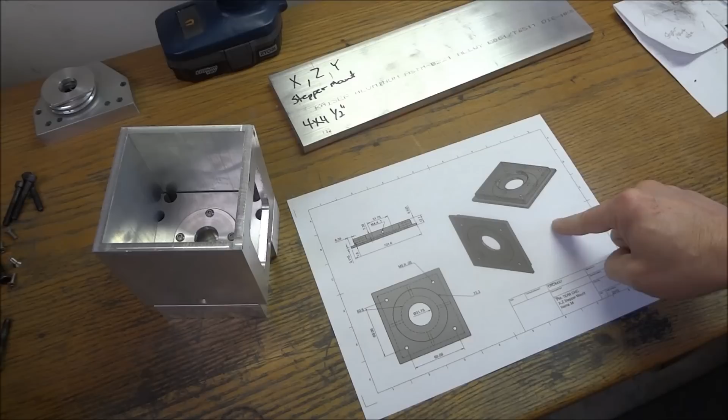Well, we're moving right along, and in the last video we finished up our bearing covers. The last thing we need to do for our X mount is our stepper motor mount. So today we're going to start working on that. We're starting off with a 4x4 by 1/2 inch piece of aluminum. We're going to be boring.

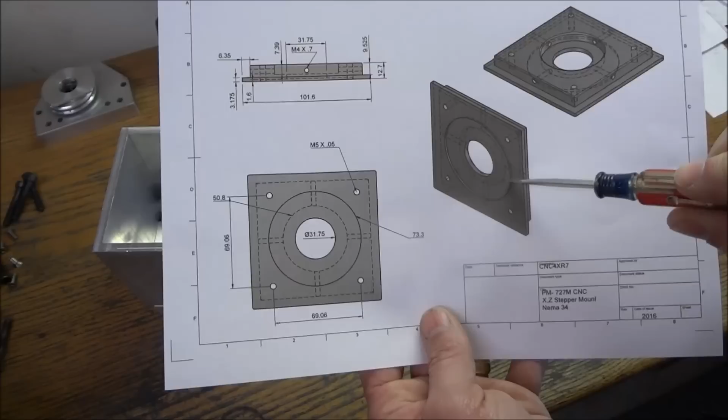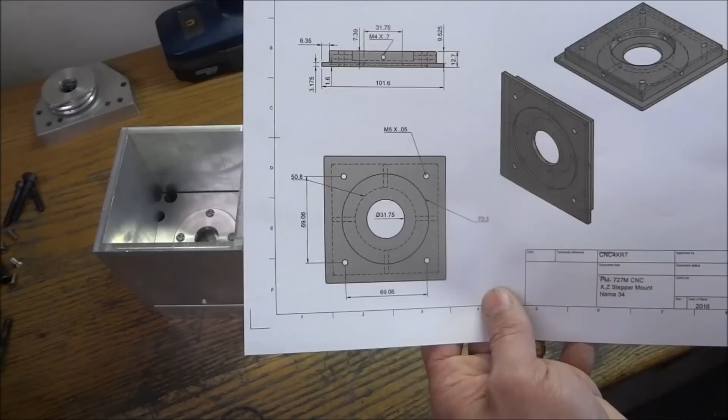So this is what our stepper motor mount looks like. We've got our hole in the center for the shaft to go through. We've got this little recess for the stepper motor. We've got our 4 holes to mount the stepper motor. And we've got these holes to mount the plate into our spacer, one on each side. And then on the back side we've got this little recess to give us some room for our coupling.

So I'm going to get this piece of stock cut. We'll go out to the mill and we'll get started.

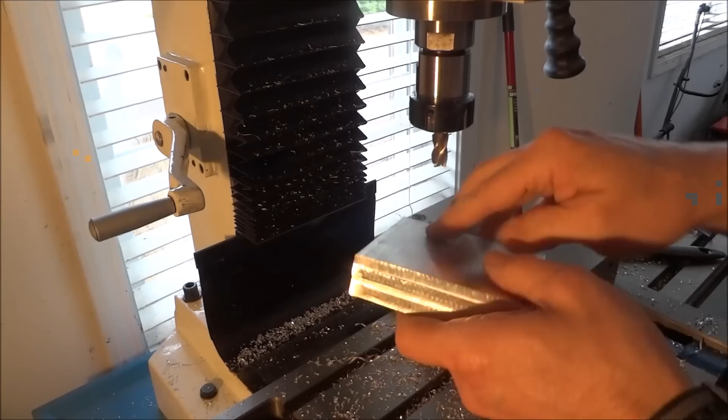Okay, I've cleaned up the edges on these two pieces, and now they are 4 inches by 4 inches, and this will be for our X-axis stepper and our Z-axis.

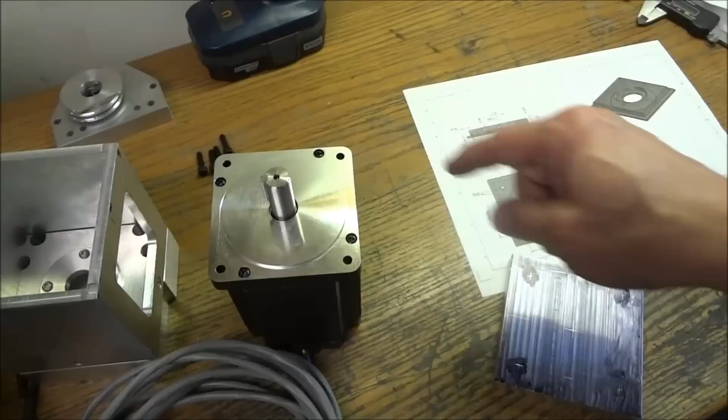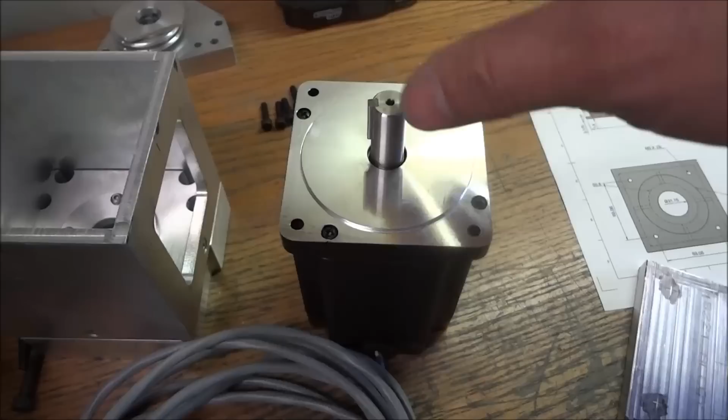Okay, so we've got our stepper mount laid out. I laid out for the 4 holes to mount the stepper, these 4 holes, and also the center. And we're just going to mill out the center hole and also this recess for the stepper to go into, and then we'll drill our 4 holes. Once we get that done, we'll flip it over and do the back side right here and get that recess. So let's get out to the mill and we'll start working on this.

Okay, we've got our stock mounted in the vise, and I'm just going to center drill and then drill a 11/64 hole, and that should be good enough for our M5 by 0.8.

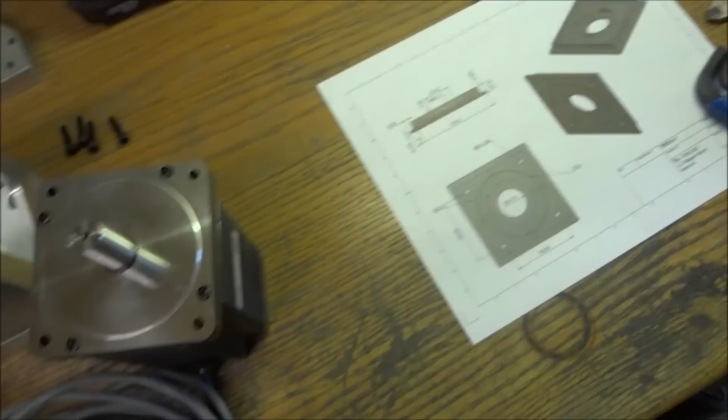That's just the through hole for the shaft for the stepper and the coupling. Okay, next we're going to do this 73 millimeter recess right here, so that this will fit down inside it. This is 73.3 millimeters in diameter, and it's about 1.6 millimeters deep.

Okay, I've moved this out in the center hole. I've left the boring bar in the center hole and I've moved it out, and I've got to get it out wide enough so that I can switch it into this outer hole. So in order to turn that big of a radius, I'm going to have to move the boring bar from the center hole to this outside hole, and then we'll have to adjust this back.

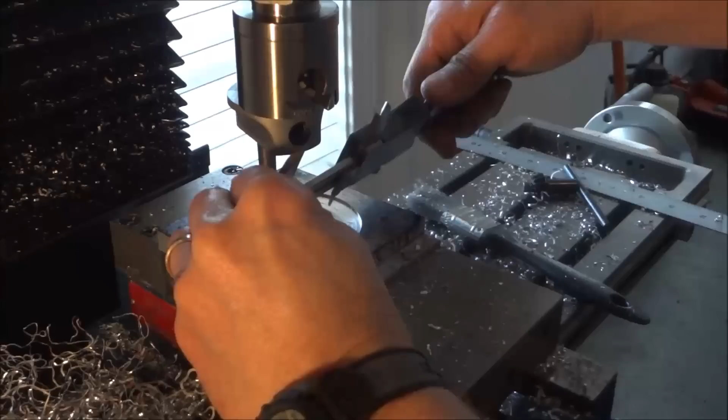Okay, we're done on this side, so I'm going to take this out. I'm going to double check all this, and we'll flip it over and we'll work on the back side.

Okay, so I flipped it over and got it in the vise, and while we still have the boring bar set up in here, I'm going to relieve this area right here so that the coupling, if it needs to, it can slide down in there without any interference. Let's get started.

Same as we've been doing, we're just going to take a little bit and then gradually work our way out until we get to the correct diameter.

Okay, we're about 42. But you can see how the coupling will drop down in there, and I want to be able to get to the set screw. You see how it's in the end, so you got to have enough clearance if this goes down in there for you to be able to reach that set screw. So I need to go about 8 more millimeters.

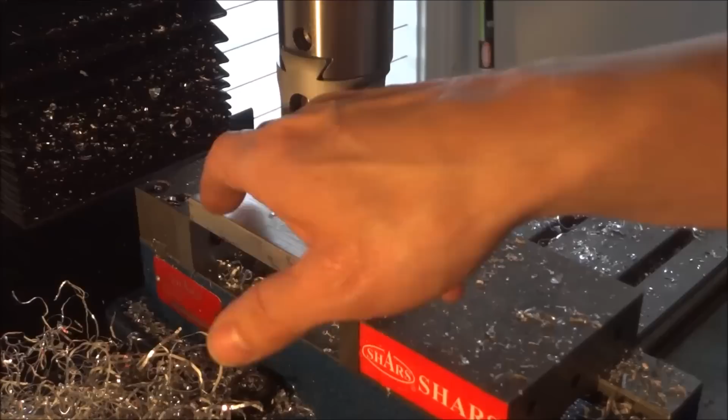That should give me enough room to get in there and tighten that up if I need to. Okay, so I'm going to take this boring bar out, and I'm going to put my end mill in here, and we're going to come along and put that recess all the way around. It's going to be a 1/4 inch wide and 3/8 inch deep.

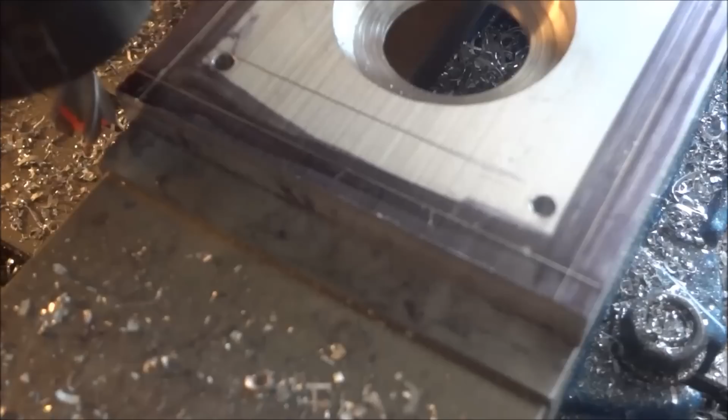Okay, so I've got my stock raised up. What I did was I just took a piece of cardboard and shimmed it up, and so now I have just literally a sheet of cardboard more than 3/8 of an inch, and I've set my depth, and you can see I've scribed my lines here, and we're just going to come over a 1/4 inch and put our step all the way around. So let's just do that.

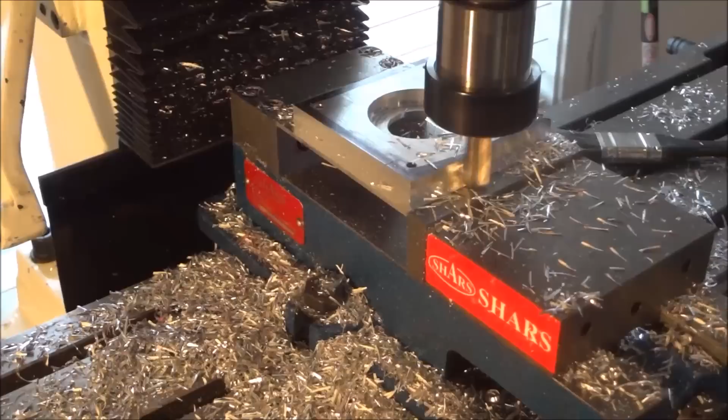Okay, so I've just taken a scrap piece of 1/4 inch stock and just kind of checking it. I think we're fairly close. So now I'm going to just take some measurements and we'll get it just right. And also check the fit with the square tubing.

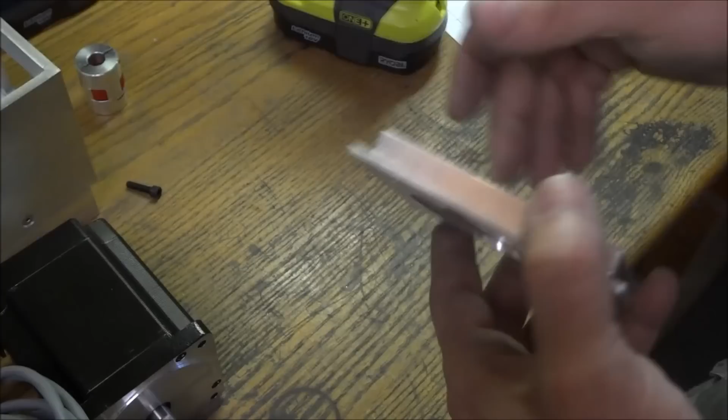Alright, well, I'll clean this up with a little sandpaper. Cover fits on there real nice, like so.

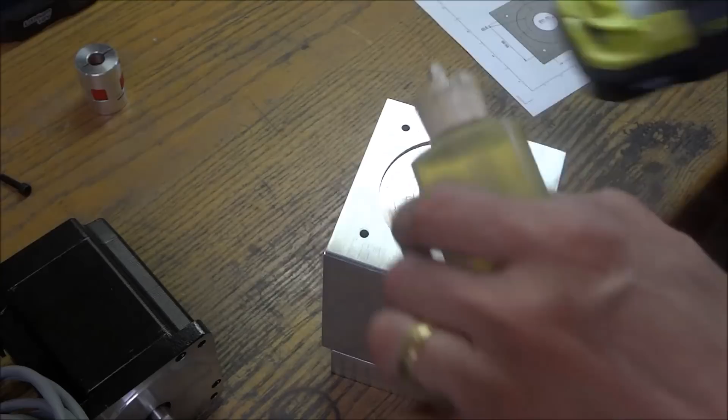And now we need to, I want to tap these holes next. So I've got we're going to be using M5 by 0.8 screws, and I've got a M5 by 0.8 tap here. And I'm just going to run this down through here and tap these holes. Got a little tapping fluid here. This is just 2 parts kerosene, 1 part motor oil. Seems to work good for me.

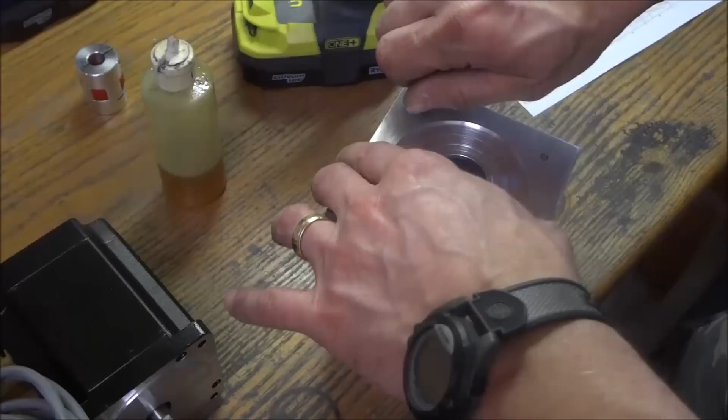Tap these holes. That'll work. So I'm going to get the rest of these tapped and we'll be right back.

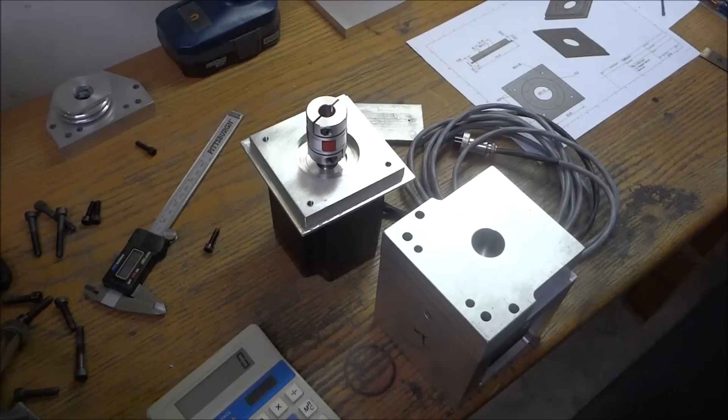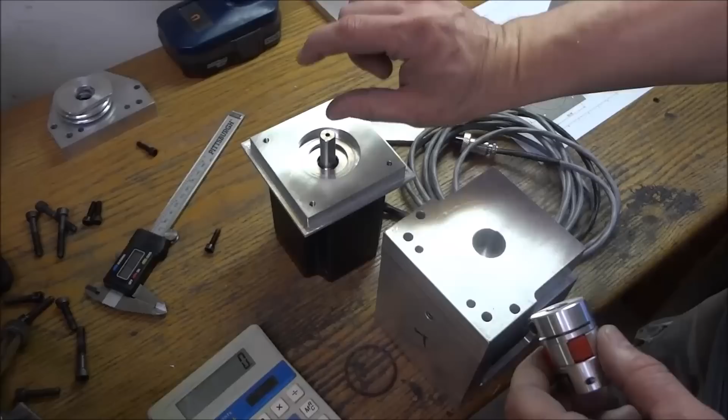Alright, so now that I have my holes threaded, what I want to do now is make sure my distances are going to be correct. Depending on what type of couplings you get, they all vary in size, and even though I took the dimensions they sent, you really never know how it's going to work out.

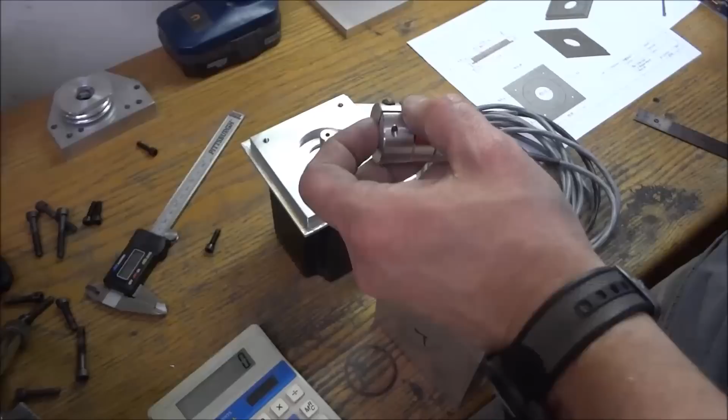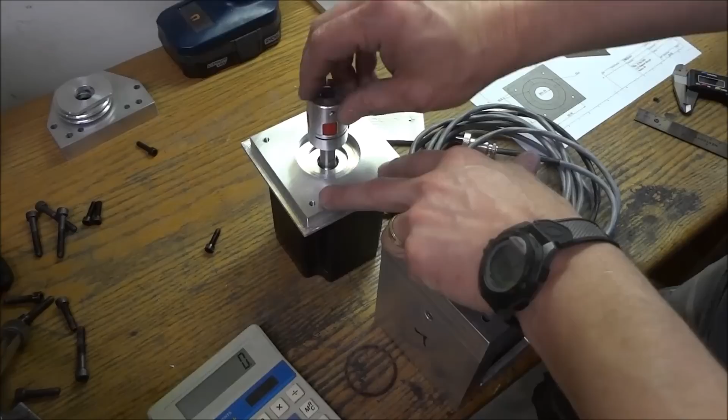These particular couplings are 40 millimeters long, and they go in about 23 - is that right? Let me double check. They go in about 20 millimeters on each side, but it's not completely all the way through. And this shaft is 32 millimeters, so it's not going to go all the way down.

So I kind of guesstimated on the length of my spacer, and I really didn't know for sure what the length was going to be until I got it all mocked up. And it looks like that 4 inches is just about 10 millimeters too long, or about 3/8. Now, I made the error of going ahead and cutting this out before I took that measurement.

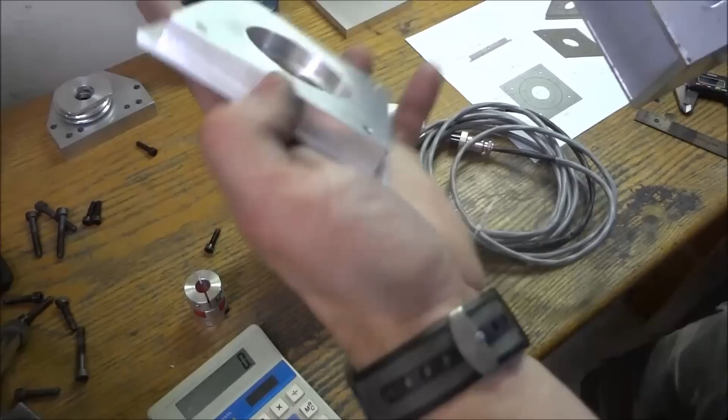So now this is not going to be quite centered, but it'll still be fine because this is flush with this, and then this will be flush with the stepper mount, because this recess is actually 3/8 of an inch deep. So it'll just be about like sitting like that.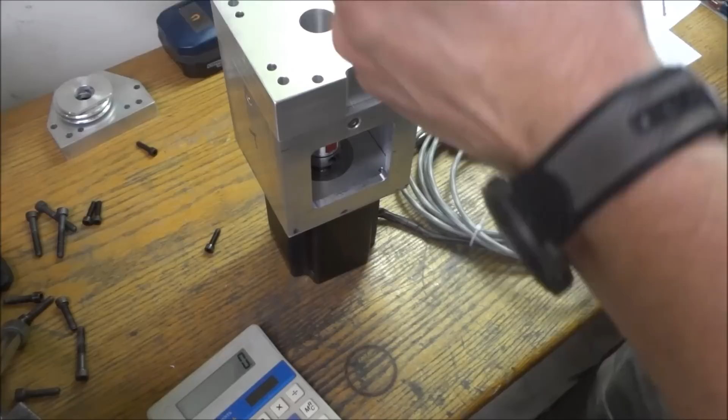As it sits right now, what I did was I put it all together, and then I measured straight down like so to the center of that coupling to this bottom here, and that's 100 millimeters.

And I know that where the bearing sits and this right here is 18 millimeters, so I subtract that from 100, and I get 82 millimeters.

Now the distance between where the bearing sits on the ball screw and the end of the ball screw is 70 millimeters. So that's 12 millimeters. That's going to give me a 12 millimeter gap right there.

So what I'm going to do is, if I take 10 millimeters off of this, then that'll leave me with just a 2 millimeter gap in there, and that should be sufficient.

Now you're going to have to do this on each axis, because the Y axis is a little bit different, and the Z axis shaft is a little bit different, so the coupling may be a little longer or shorter. So depending on what couplings you get, you're just going to have to tweak this dimension, but do as I did and cut it a little long.

Save this until you get this measurement set just right. So what I'm going to do now is go trim this off in the mill, take 10 millimeters off of it, and then we'll come back.

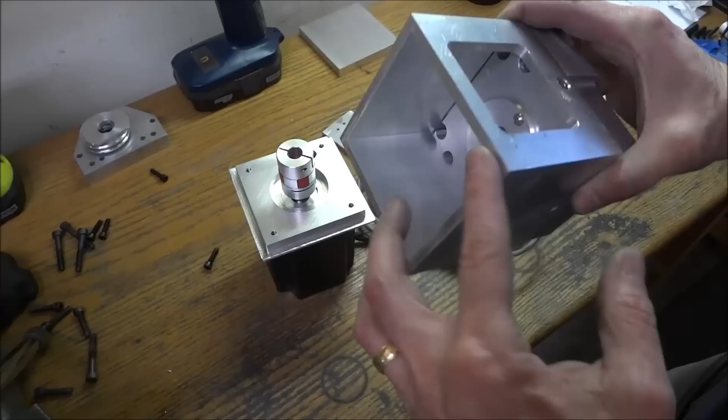Alright, so I've bandsawed a 1/4 inch off, put it back in the mill, and then took it down to 10 millimeters. The total width of this spacer now for the X is 90 millimeters.

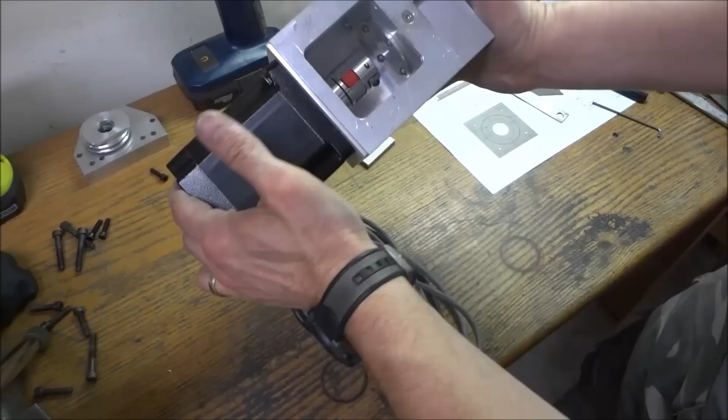And when it's all together now, it looks like it's going to work just fine.

Okay, so now that I have that adjusted, when you do this, you can just make this 10 millimeters shorter. But you can see we're still going to have clearance there to bolt up our stepper mount, which is what we're going to do next.

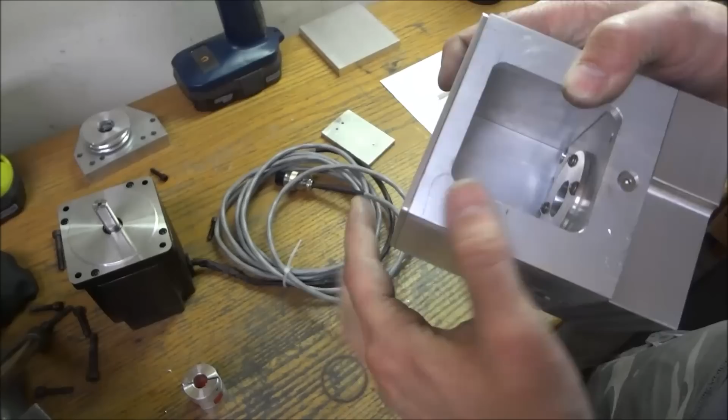And we'll probably just use these same screws. So we'll just drill 4 holes. I'll do it with this clamped together, and then just like what I did with this, and then tap it. So now let me get that set up and we'll do that.

Okay, so I've got the stepper mount kind of taped in place just to keep it there. It's clamped in the vise. I couldn't turn it 90 degrees because it's too wide to fit in the vise. This is only the 4-inch vise, but it should be okay.

We're just going to center drill, and then I'm going to drill all the way down at least 15 millimeters for the threads, and then we'll come back and just drill through the spacer for a through hole. So let's get that done.

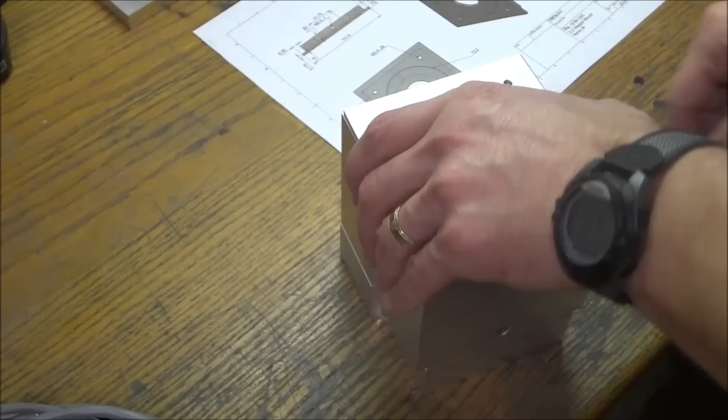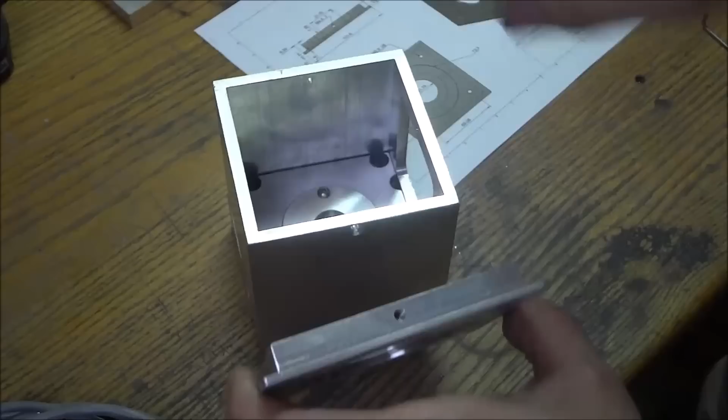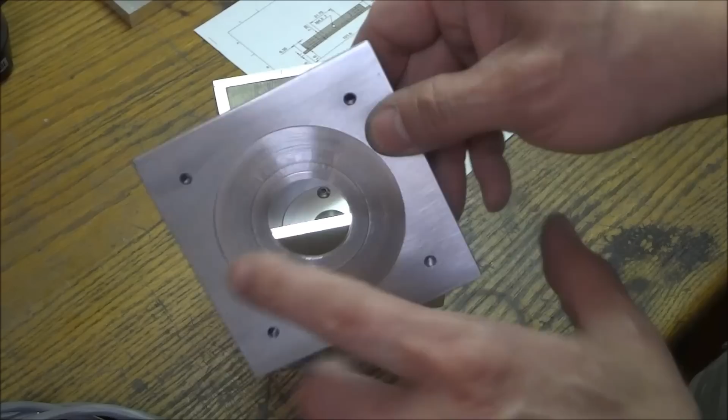One thing I want to point out is, because we manually machined this whole mount, not everything's going to be lined up perfect. So do yourself a favor and somehow mark the end - this is top and it says X, because I'm going to have a Z stepper that's going to look just like this. That way you know which orientation it goes, and all your holes will line up.

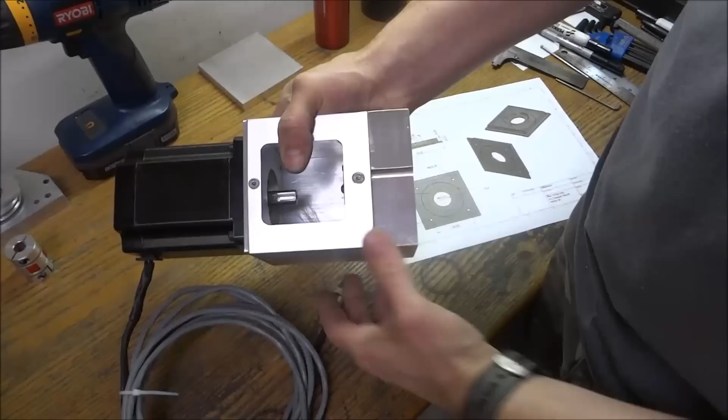Alright, well, we've got the motor mounted onto the stepper mount. Everything's bolted together. You can see how the X-axis is going to look. I think it all turned out really well. So that wraps up our X-axis stepper mount.

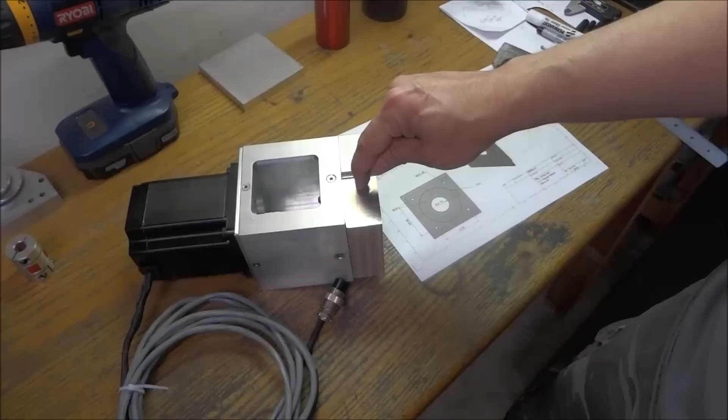I still need to make the spacer that goes in between the bearings for the ball screws, and I'll do that and get it mocked up just to make sure everything checks out. We still need to make the coupling that connects the ball nut to the saddle, but I don't want to do that until I get all the mounts made. I'm going to have to disassemble the mill to do that, so I want to make sure I get all my mounts made. So in the next video, we'll work on our Y-axis.